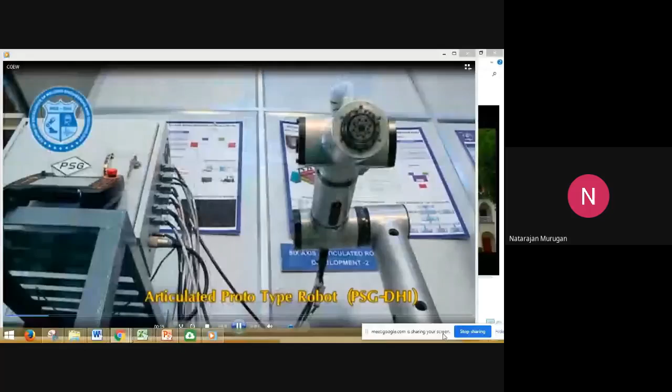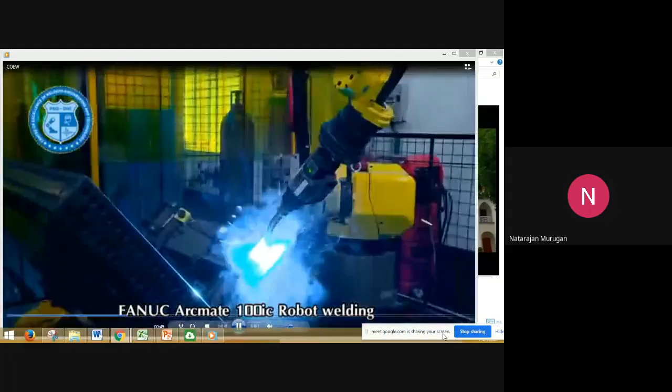PSG College of Technology has established an advanced center of excellence in welding engineering and technology with financial support from the Department of Heavy Industry, Government of India. An articulated prototype robot has been successfully developed as part of a welding automation project. This is a 6-axis robot which has been interfaced with a MIG welding system. A gantry welding system has been developed for welding circumferential and longitudinal joints for applications like pump casings. Weld fabrication of wind tunnel box and carriage components is carried out using this FANUC robot welding.

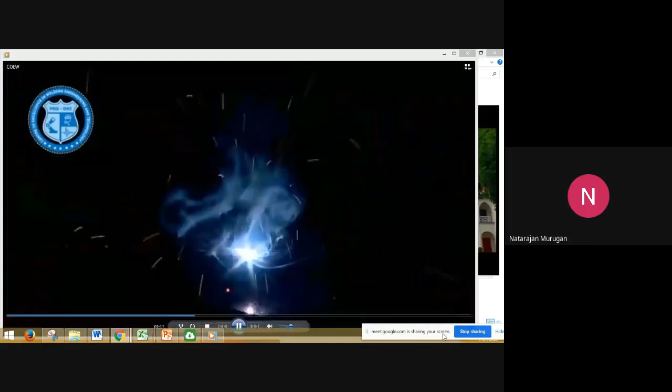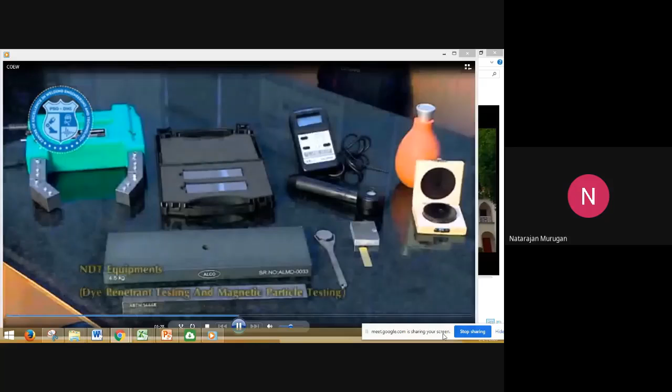The center has developed mobile app-based software for controlling the universal robot welding. The center has established a pick-and-place robot for various welding applications. The center has acquired robotic welding simulation software. A prototype inverter-based welding power source is being developed for GTAW and SMAW welding applications. The center has established advanced NDT facilities like a phased array ultrasonic testing unit incorporating the TOFD feature. Conventional tests like magnetic particle test and penetrant test facilities have also been established.

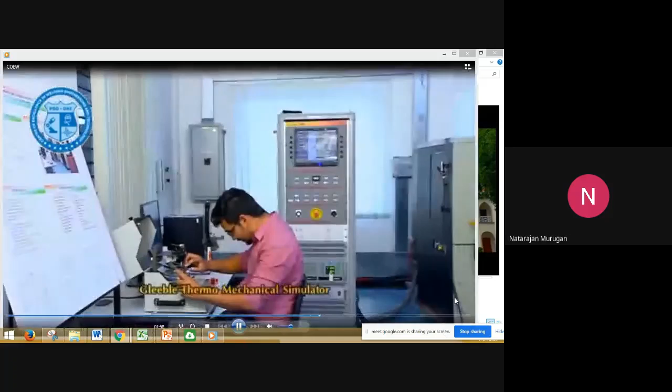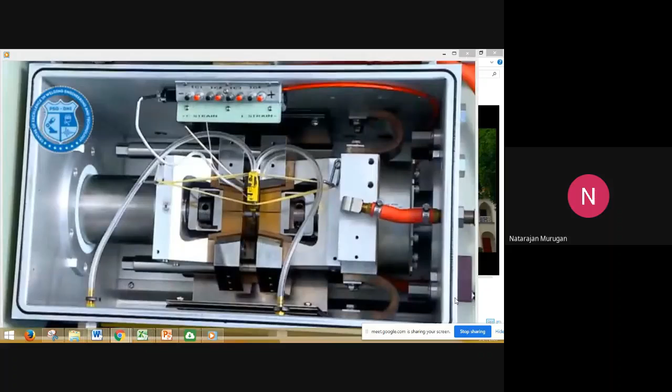The center has a state-of-the-art metallography facility for microstructure analysis. Stereo microscope, inverted microscope, and automated hardness mapping machines are some of the systems in the metallography section. Alloy design is a powerful technique for development of new welding consumables, with Thermo-Calc software established. Arc welded specimens can be physically simulated using this advanced thermomechanical physical simulator called Gleeble. This machine can also be used for physical simulation of hot forming, powder metallurgy, and metal casting applications.

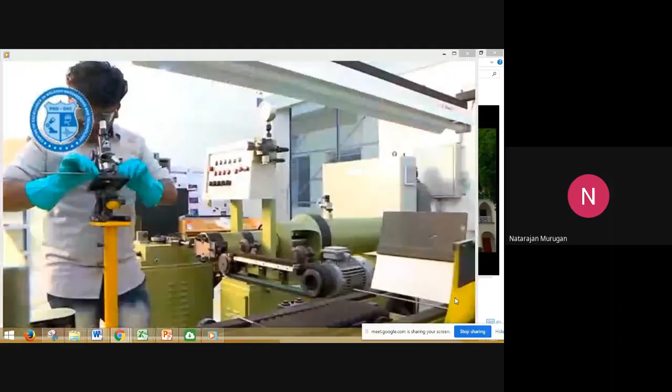Development of newer welding consumables has been made easier through establishment of a pilot electrode extrusion plant for flux coated electrodes. Electrodes of nickel alloys and other alloys with formulations carried out in-house are currently being extruded in this plant. The center has a Hannover analyzer for checking the usability characteristics of welding consumables. Okay.

Okay. So you might have seen the various facilities available in the Center of Excellence in Welding Technology. So those who really want to pursue your PhD or do some trials, experiments, you can use these facilities to carry out your research in welding engineering and technology. Okay. So this is my lecture.

So I will be just introducing what is welding and what is welding automation and what type of welding processes are used for robotic welding. Okay, you cannot use all processes for robotic welding. Only processes which are suitable for robotic welding, especially which can be easily automated. That is the main idea. Which can be easily automated, that can be used for robotic welding.

So before going to that, let me explain what is welding. What do you mean by welding? What are the various processes of welding? Okay, so we generally deal with materials, especially engineering materials. Most of them are metals. Mostly we deal with that. So joining of metals, or welding of metals.

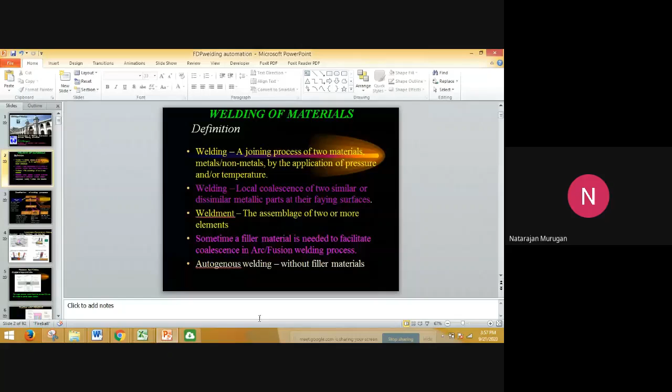Thank you, sir. So welding is one of the major production processes, like metal casting, metal forming, and metal joining. Metal joining is very important. Two pieces can be joined by two techniques: the fusion technique and the pressure technique. Let me give the basic principle of fusion technique.

Two metal solid pieces, when you apply heat, especially locally at the edges where you want to join, not the entire thing, the edges will be heated locally and raised to a melting temperature, above the melting temperature, so that the edges melt. Before it melts, you cannot join. So now the two edges melt and become liquid.

This liquid mixes together easily if it is the same material, like steel and steel that you want to join. So it becomes liquid and the liquid mixes together. Then after solidification, you remove the heat, and the single liquid solidifies as a single solid. So you get the joint.

This is called fusion welding because we raise the temperature above the melting point, the fusion temperature. Our freezing temperature, if you heat it, is the fusion temperature; when you melt it, it goes from solid to liquid, and if it solidifies, that is the freezing temperature. Both are the same temperature, with a slight difference depending on the rate of heating and rate of cooling. It will exactly start freezing or start becoming liquid at the melting temperature. Okay, this is fusion welding.

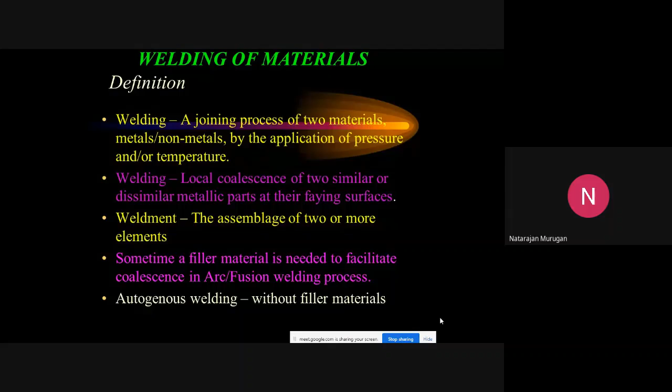So these processes - I have classified fusion welding, and another name for pressure welding is solid state welding, because we are not melting the material. We are just heating it slightly to a higher temperature so as to reduce the pressure required, and apply load so that you can join it. That way they are called solid state welding processes.

Cold pressure welding, if you join at room temperature, and friction welding, friction stir welding - all those are the latest processes. Friction stir welding, and robotic welding we can see.

In this we are going to see only the processes suitable for robotic welding applications. In consumable electrode arc welding, using electrical energy, we have gas metal arc welding, shielded metal arc welding, submerged arc welding, all those things. Then non-consumable processes like gas tungsten arc welding, atomic hydrogen welding, plasma arc welding, and carbon arc welding.

These other processes are additional processes, called allied processes - soldering, brazing, surfacing, spraying, cutting, thermal cutting. Those come under various other allied processes. It is not clearly shown here; only soldering and brazing are shown.

They are similar to joining processes, because you have seen a 3-axis robot. A 3-axis robot is mainly used for soldering and brazing. That's why these robots need all degrees of freedom - mostly we use articulated 6-axis robots for welding, please note. So these are all additional processes - cladding, surfacing, hard facing - they are allied processes.

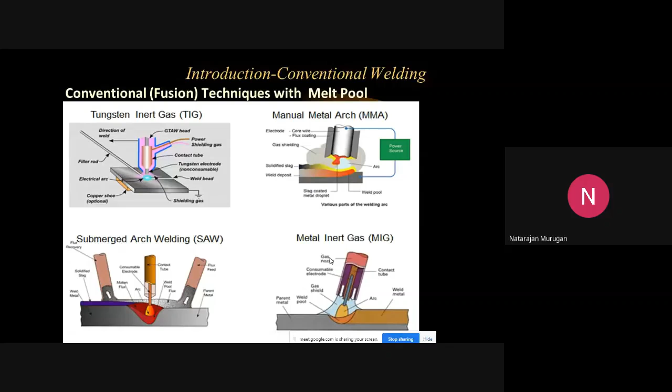This process is very important. Most robotic welding uses the MIG welding process. A lot of advancements have taken place here: CMT, rapid welding, twin arc, so many process developments. I'll just touch upon the basics first, which you should understand, then we can go to other processes. MIG welding I'll touch upon tomorrow.

Resistance spot welding and MIG welding are especially used in the automotive industry. Some 20 years back in the USA, GMAW replaced most of the SMAW process because it has higher speed and higher deposition rate, and it can be easily automated. Resistance spot welding is mostly used in automotive industries for fabrication of components from thin sheets, 3 mm thickness, sometimes even up to 6 mm. You can weld higher thickness also, but mostly it's automotive industries and thin sheets.

Here there are 2 copper electrodes, and current will be passed through them. At the interface, resistance will be high, so I squared R heating will be high at the center. It will melt, and by the application of pressure it will be joined. So this is resistance spot welding at a particular location.

In seam welding, the parts are welded continuously with overlap. Instead of a rod electrode, a wheel electrode will be used, and the parts will be passed through the wheel, so that you get these nuggets continuously overlapping. That is called seam welding. These things we will see tomorrow.

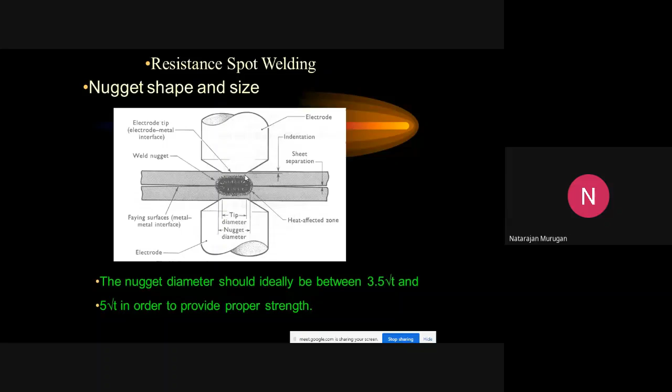Plasma arc welding is an advanced version of TIG welding. Plasma is an ionized flow of gas. You know the temperatures: in gas welding, the flame temperature is 3200 in a neutral flame. The hottest flame is the oxidizing flame at 3400.

In arc welding, we get very high temperature at the center of the arc. The arc will be bell shaped. As the distance from the center increases, the temperature decreases. At the center, you can have 6000 to 7000 degrees centigrade in ordinary arc welding.

But in plasma, practically we use 17,000 to 18,000 degrees centigrade. So here the idea is when you pass another gas called plasma gas or center gas or orifice gas, which is coming through the orifice, which is passed through the center, that's why it is called center gas. So when it comes out as a plasma, very high heat is produced.

The energy level goes up to 10 power 7, 10 power 8 watt per meter square. So that's why metal becomes vapor, and there is a digging, and the mode of welding changes from conduction to keyhole mode, deep penetration mode. Please note that. This way it is plasma, very high temperature, very fast you can weld, but the equipment is very costly.

Even in 1998, when I called for a quotation, it was 15 lakhs at that time. So very costly because of the energy level. So that's why it is not being used in India that much, but we are using it for stelliting. Various other industries, various valve industries, use this process for depositing. So that is wire arc additive, and similarly we are depositing and increasing the properties of the surface. Cobalt based alloys or Colmonoy or Inconel, various alloys we are depositing.

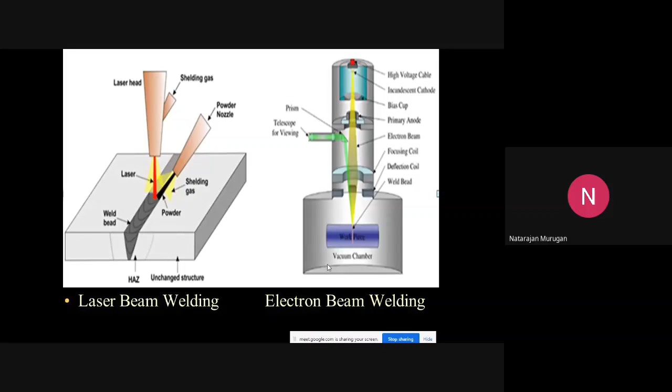There are 3 types of vacuum based on the economical point of view, all those things. Okay, so these are very important processes. The latest process, especially for robotic welding, is friction stir welding. It's a solid state process, 2 pieces to be joined. If possible, tomorrow I will explain in detail with a video also.

So for 2 pieces, just a rotating non-consumable tool is used. When it is rotated and plunged inside, there will be a pressure; load is also given. There will be a pin this way. This is the shoulder, and the pin will be there. The pin will be plunged in the gap between the 2 plates to be joined. Generally no gap will be there initially, so you have to plunge it. It will be rotated and plunged inside.

Due to the friction between this pin and the job, and the shoulder and the job, heat will be produced. The temperature is not going to be raised up to melting temperature, it is lower than that. In case of aluminum, we have seen 400, 450 degrees. Aluminum melts at 660. In steel, we have seen up to 900 degrees, even 1000 degrees, in stainless steel and steels. So it won't be melting temperature.

Due to the frictional heat, the metal will be plasticized and it will be moved. When it is plastically moved around it, when you move the job, this is the advancing side, this is the retreating side. Metal will be moved, and when it moves to the rear side, the metal will be forged and it will be solid. It will be joined together. That's why it's just a pressure, and heat is produced because of the friction.

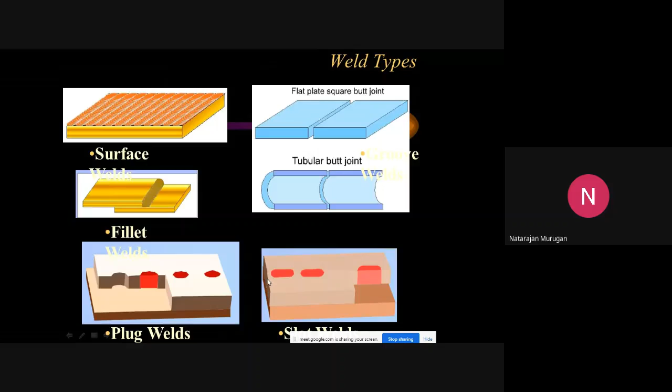Just a minute, please. Okay. There is disturbance. Sorry, just a minute, please. Okay. So these are the questions, please, you should remember, right? Okay. I'm sorry. Just a minute, please. They are doing some work in the house. All right. Okay.

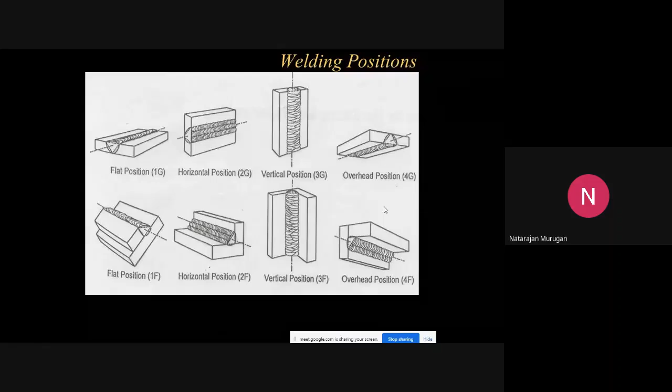What is welding automation? We have seen different types of welding processes. In manufacturing, we know very well automation means doing all functions or some functions mechanically. Here, the welding process consists of various steps, 8 steps. How we are going to mechanize those steps, then we can say different types of automation.

The main purpose of automation, as you saw in the morning class, is mainly to reduce the cost, increase productivity, and improve quality. You can have a lower space requirement and reduce the cost. I know it's not robotic welding automation.

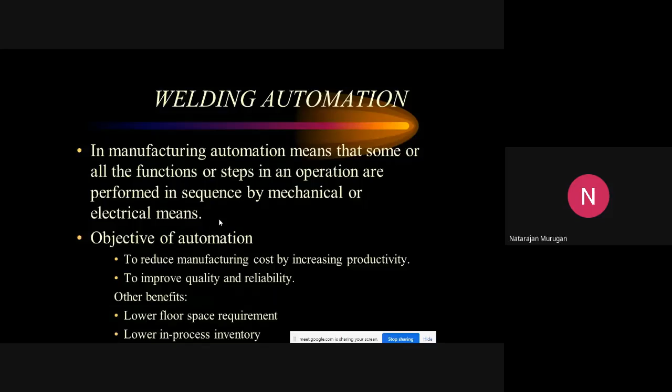Okay, so mainly automation means we have to increase this process. In many processes it is very difficult to weld continuously, so there will be fatigue and other problems, and we may not have a consistent thing. So you can do the work. So that is welding automation.

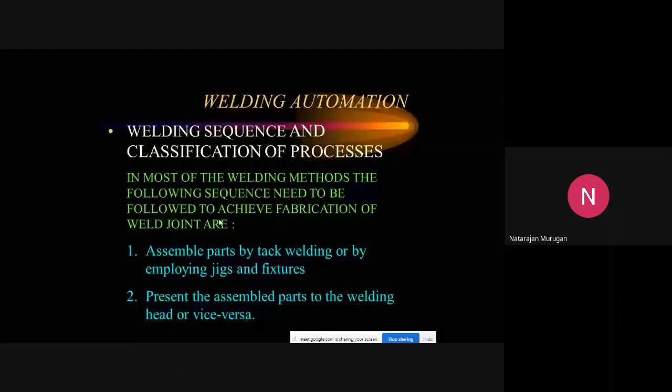Okay, so when you see the welding sequence, there are 8 steps for any welding. So these are classified into 8 steps. First step, parts to be welded. Jigs and fixtures can be used, or it can be just assembled and manually welded. So tack welding, you have tack welded that way.

Okay, so the arc has to be struck. Arc has to be struck. So the arc will be struck, I mean the arc has to be initiated so that the fusion welding will be taking place. Then once the arc is started, if it is maintained at the same place, so that you have to weld the entire.

So you can see in this picture the first step I have just shown by hand written. First step, assemble the parts and tack weld. Second step, it is brought under the welding head. Here I have shown just a stick electrode. Third step, start the arc, initiate the arc. Then fourth step, you have to provide relative movement, start moving it.

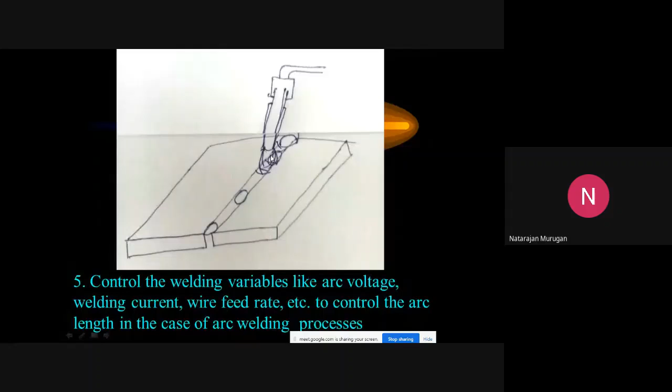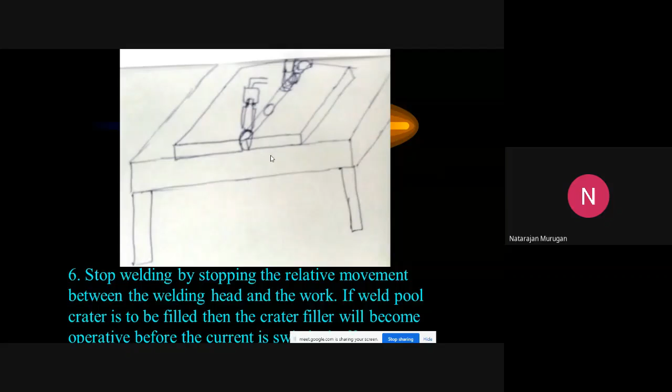And fifth step, you have to control the variables. So arc length, all those things have to be controlled. Then sixth step, just reach the end of it, stop welding. You can switch off the power source, or you can just raise the stick electrode, it will be off.

Seventh step, you can shift the welding head to the original position so that the welding cycle can restart. Eighth step, you can remove the plate, or alternately change the plate after welding and move the head to the initial position. These are the 8 steps, especially for robotic welding.

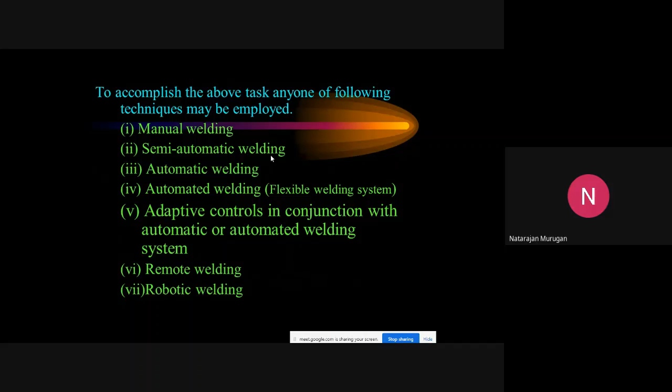So based on these steps, if you want to automate, depending on which steps are automated, this will be classified into various levels of automation. Types of automation: manual welding, all 8 steps are done manually. Semi-automatic welding... first, manual welding, all steps.

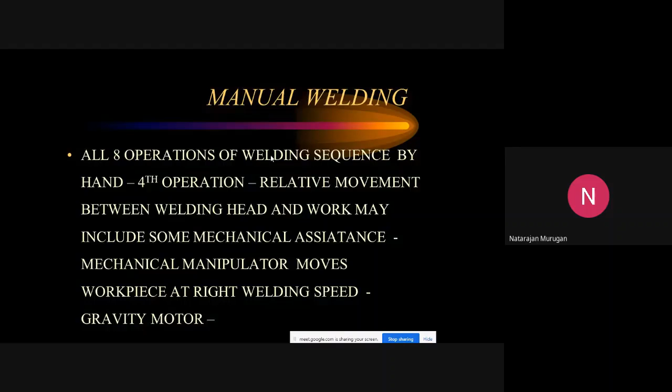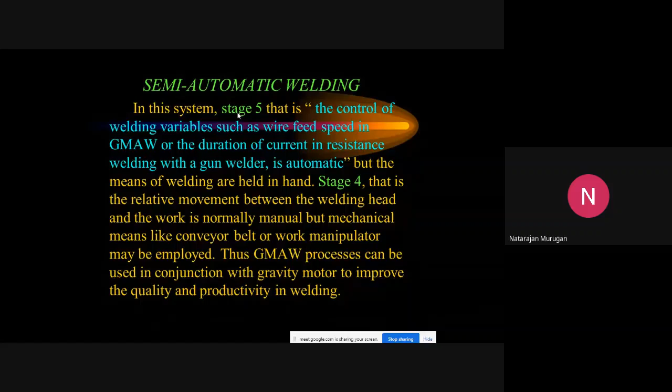And semi-automatic: here the fifth step, control of welding variables, arc length, current, voltage, is controlled in the power source by setting it. Once set, there is provision to maintain a constant arc length, and voltage is controlled. Sometimes stage 4, relative movement, is also done mechanically. Then it is called semi-automatic welding, mostly used for stage 4.

So at the end of the weld, generally if you see, there will be a small depression, because when the welder wants to stop it, he will be just pulling the electrode. So he may not feed the molten electrode at that location where we want to stop the arc. Because he is pulling the electrode, increasing the arc length, the arc will be quenched off. So at that time he may not feed the metal. That's why there will be a depression, and in that depression there will be crater cracks sometimes, because the thickness will be very less compared with the remaining portion of the weld, since the metal is not added.

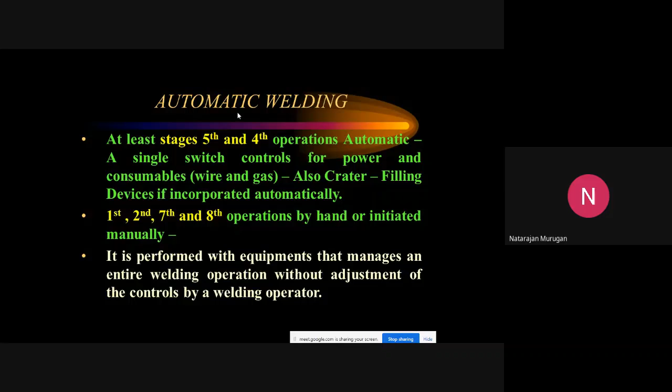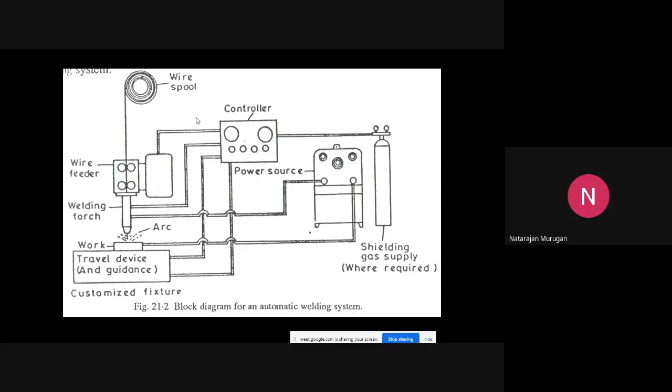Then these are some of the examples of automatic welding process. You can see the arc is starting. All the power source, everything will be controlled. Only 1, 2, 7 and 8 will be manual. Other things will be done by the process control. And this is also similar.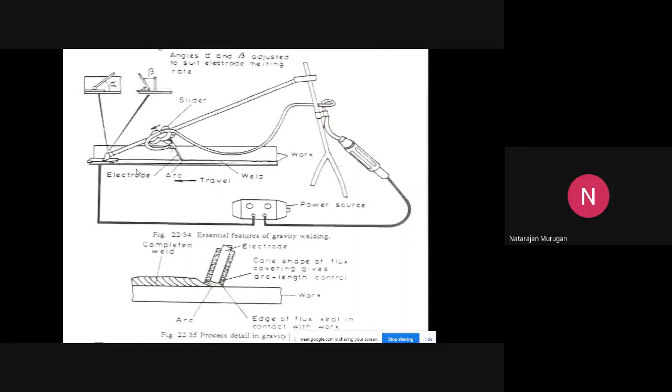In this automatic process, they can also use gravity welding, use of the gravity. What is gravity welding? Here there is a sliding slanting rod, in which an SMAW stick electrode is fixed. When it is dropped from here, you can easily weld from here to here. The length will decrease automatically. You have to set the slant angle properly based on the melting rate of the electrode. Please note. These were initially developed for automatic welding, and now it is very cheap, low cost. Firecracker welding is also similar, and that is still being used.

There are a lot of advantages in automatic welding. The only problem is you have to do it in mass, so that the number of parts welded will be more. Then it will be very useful, but it requires capital investment. And you can have a good quality weld continuously, consistency, all those things are main advantages.

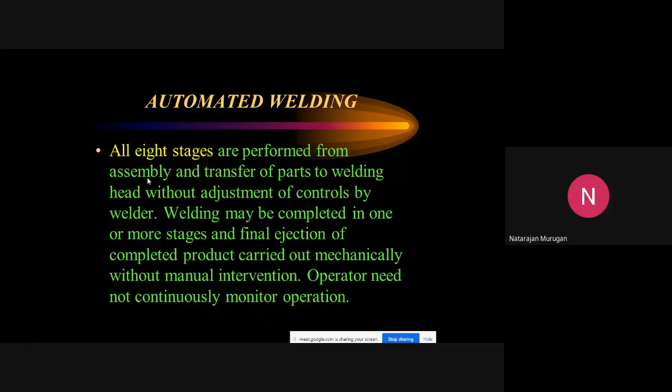Then what is automated welding? All 8 stages, from the assembly to the transfer of the parts, are completely carried out by machinery. That is called automated welding. Very few processes are like this. You can see this complete automation process, some of the automated welding processes, including loading and unloading. All the things are possible. So, setup.

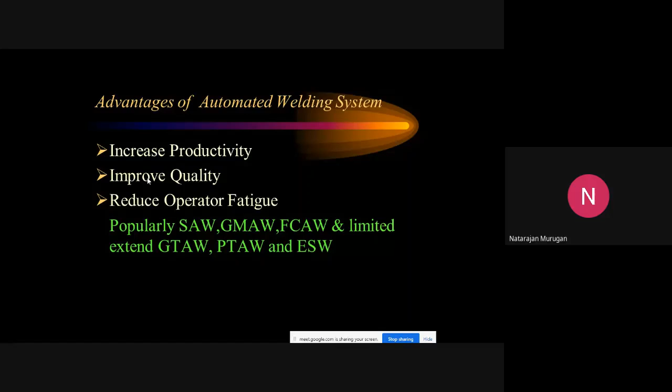Okay, so this automated welding mainly increases productivity, improves quality, reduces operator fatigue. This is mainly used completely. A supervisor just watches how it is going on. There is very rare intervention of the manual welder. Mostly such systems are costly, but flexible, with all the advantages you can have.

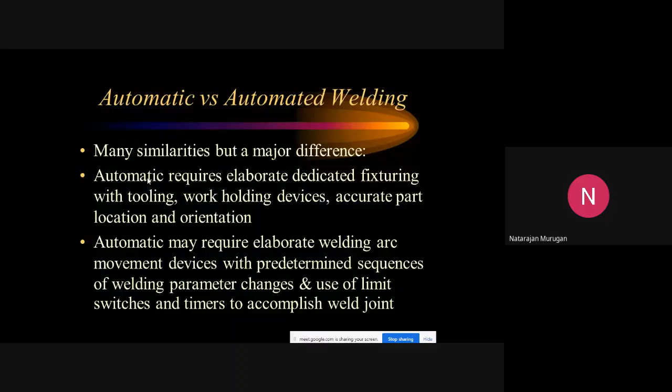So what is the difference between automatic welding and automated welding? You know very well, all the processes here. So steps 1 through 8 will be done manually in automatic welding, while automated welding does this completely. In automatic welding, jigs and fixtures will be used. There are a lot of investment changes with respect to the various components, depending upon the components. So that is the difference between automatic welding and automated welding.

Sometimes in other places people refer to automatic welding as mechanized welding, and automated welding is simply called automatic welding. Please note the terminologies they use. These terminologies, automatic and automated welding, are very commonly used.

Automated welding eliminates all elaborate expensive fixtures, and time and limit switches used to stop the machine. In automatic welding it senses the limit switch and stops. But here, in automated welding, everything is completely programmed - each and every thing is taken care of by the process. Sensors and a lot of other things are there, and correspondingly you get good quality, production, flexibility - all advantages are there in automated welding.

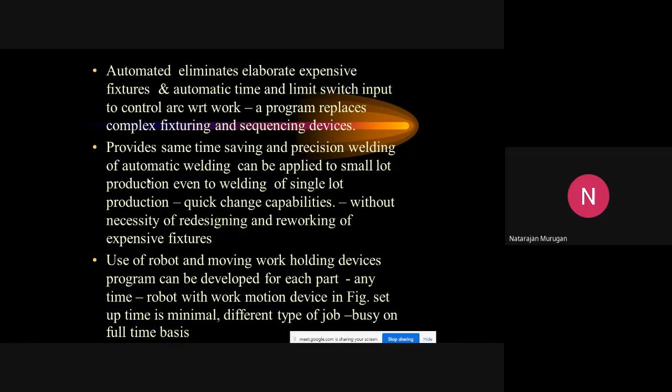Use of robots and moving work holding devices - AGVs can be programmed to supply and remove the parts, welded parts, etc. So this is just an example, an industrial MIG welding robot setup.

So these are the positioners, right? So the arc will be exactly moved based on the program in the controller. In the first session you have seen what is the function of a controller. So we have a welding controller, and the welding controller is the power source. There are different types of power sources. In olden days we had conventional power sources - rectifier and transformer, inverter, all those things.

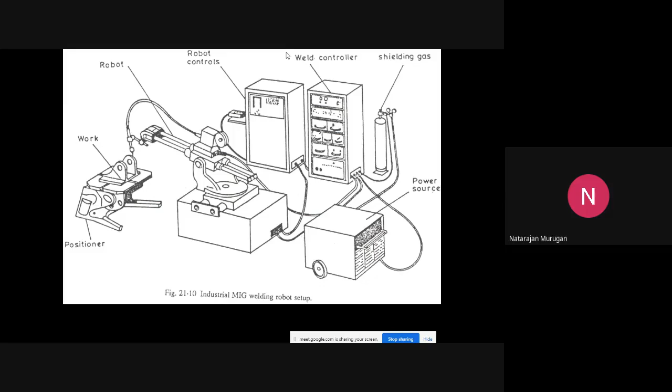The latest controller should have digital control, so that you can easily interface it with the robot controller. Through the robot controller you can control this - you can set welding current, voltage, all those things. Speed will be set in the controller because we are moving the robot. So all those things please note here. You can completely do all rotation, everything here. So this is a universal microprocessor-based welding system - a simple microprocessor can control all aspects through a proper interface, sensors, everything.

Just skipping to adaptive control, like in adaptive control in CNC machines - here also, how to move the head automatically along the seam, the center part, the joint part. Along the center, various techniques are used. That is called seam tracking - when you follow the center joint path, that is called seam tracking. Various methods are used.

Why is it important? When the head moves slightly away from the center, then there won't be proper fusion. One plate will melt while the other plate will not melt fully, and you won't get full penetration. That's why seam tracking is needed. Manually, if you do it, you will just be moving along the center, but mechanically you have to move it.

Mechanically you move it, so in that case it is essential that the head has to move along the center. There are different methods available - mechanical,

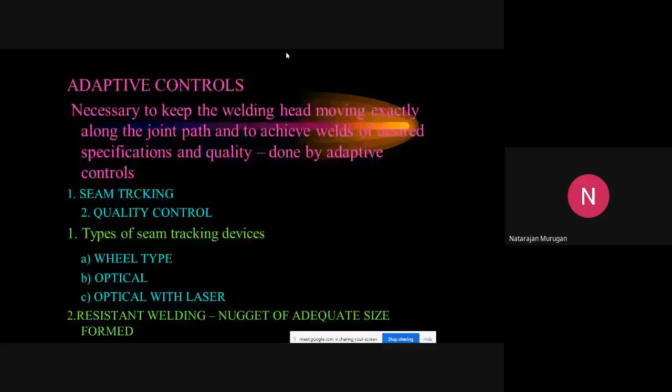or laser, optical, laser with a laser sensor - it is there. This will be used for a wheel, like a roller, like a wedge moving along the center, and the head will follow that. That's why you see this wheel - here the welding head will be melting and fusing the plates. This is a simple technique.

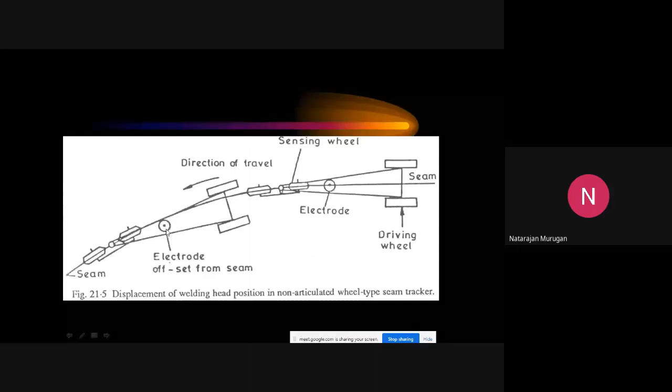You have others too - even in curvature you can do it. The seam will be along a circular or other profile, so it can be moved like this, sensing, and it will be moving. These are the various techniques - optical type. The optical sensor will sense the seam, the center of the joint path, and give the corresponding signal. The computer will move the gun this way or that way accordingly.

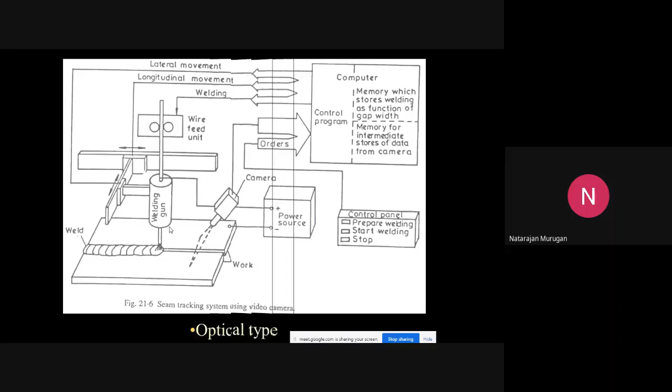Vision systems are also used here - this is an optical system. You can have a laser system or electromechanical devices. There are a lot of systems especially for welding automation. When you do it in automated or mechanized condition, it has to be moved through the center of the path. So there are a lot of methods.

Sophisticated type, it may oscillate the arc also - oscillation of the arc to increase the width of the welding. You can do it this way. Manually it is done generally for bridging the gap.

Some places the gap will be more, some places less, as two plates are joined. The welder will sense where to move, where to deposit more material. But during automation, this has to be sensed by the proper sensor, and it has to be communicated, and the head has to oscillate or move accordingly.

Laser beam also is used for tracking the joint path, but it's costly based on that.

So remote welding, also, is welding automation - like for nuclear reactors. We can't go inside a nuclear reactor, so all operations can be programmed, and a robot will go inside and do the welding. There is no monitoring or adjustment during operation, no human factor, for maintenance operations, especially in nuclear reactors.

Various other places too, suppose welding in space - some components are in places very difficult to access, you can't go there. In such conditions, this remote welding is used.

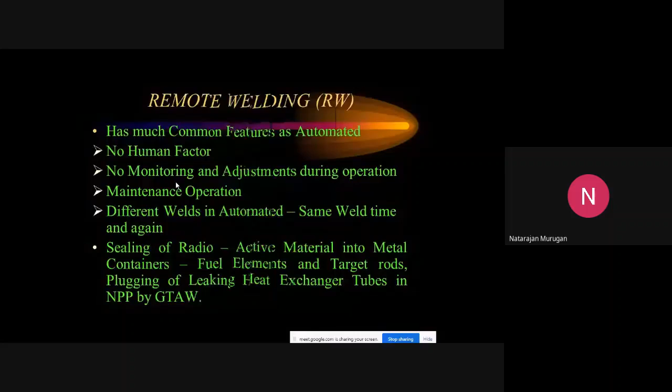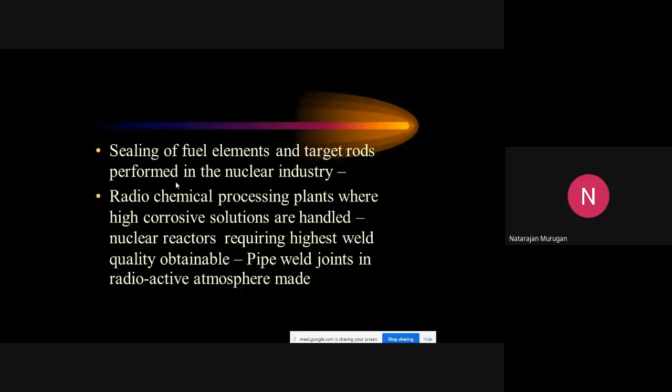Sealing of fuel elements and target rods in the nuclear industry is very commonly used. In radiochemical processing plants, highly corrosive solutions are handled, so those conditions require a remote welding process. This is operated remotely, and it will go and plug leaking things - all those things are possible.

Now for robotic welding, a part of automated welding. What is the main function here? It provides the relative movement, and it provides the gap also between the electrode and the job.

We can program it carefully, so this is mainly for repetitive jobs. All the actions of man - monotonous and fatigue tasks - will be carried out by robotic welding, providing cost-effective solutions to many arc welding tasks. Whatever the program, you have flexibility - whatever way the job requires, we can call the program, edit it if you want, then run it and weld.

Mostly 5-axis or 6-axis articulated robots are generally used in robotic welding, suitable for a range of tasks, with the program stored in the controller's memory. At any time you can do offline programming and load it to the robotic controller, then perform it.

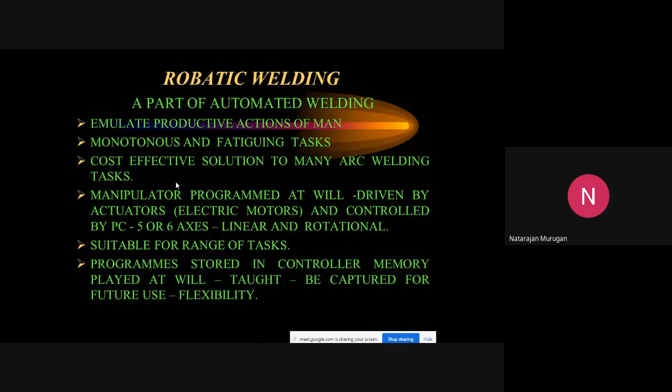Various ways are there - it's a big welding robotic system. I have one system, this I'll show you.

That is the latest process, wire arc additive manufacturing. If you see that, this is especially for robotic welding - instead of welding, here is what we go for.

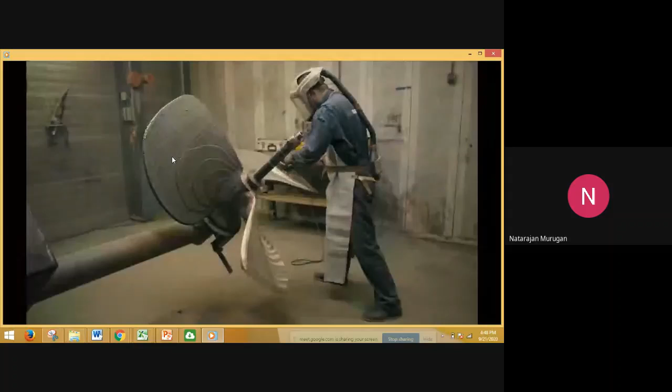Damen Stan Tug 1606 workboat. Many have come before it, and this will certainly not be the last. Still, this one is special, not because of what you see above the water, but because of what happens below the water. This vessel is propelled by the WAAMpeller, the first class-approved 3D printed propeller. This project took 7 months to complete and brought together key players from different industries, all with the same goal: to manufacture and certify the world's first wire arc additive manufactured propeller.

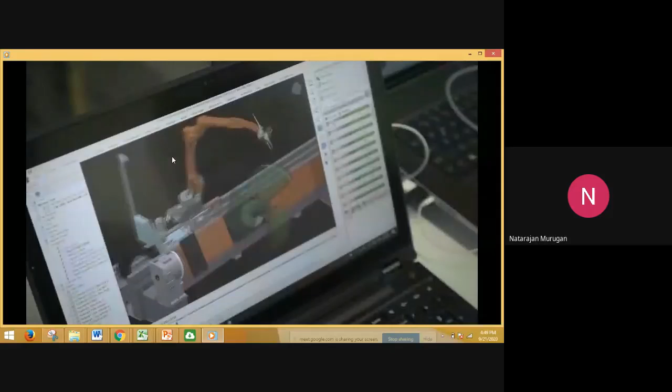The starting point of the project was a propeller designed by ProMarin. Before it could be sent to the 3D printer, the design first had to be transformed into a so-called CAM strategy, a detailed plan of how the printing of the complex double-curved geometry of the propeller blades should be carried out. This strategy was worked out by Autodesk using their PowerMill software application. Meanwhile, specialists at RAMLAB in Rotterdam started tests to ensure the WAAMpeller would be strong enough for the job. Through different material tests and prototypes, the building strategy was finalized.

In September of 2017, everything was set to start the production. By printing a total of 2.6 kilometers of nickel aluminium bronze in 298 layers, RAMLAB created the WAAMpeller in one go over just a few days, printing around the clock.

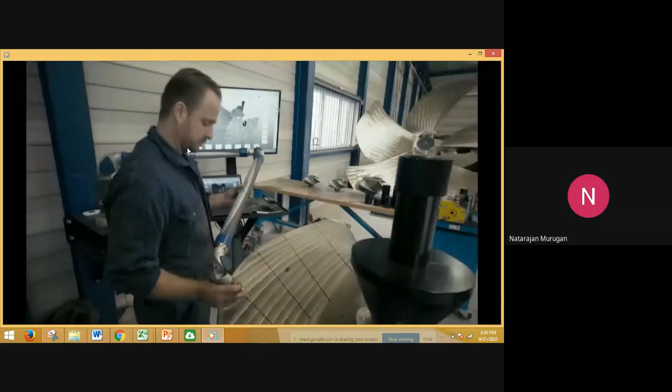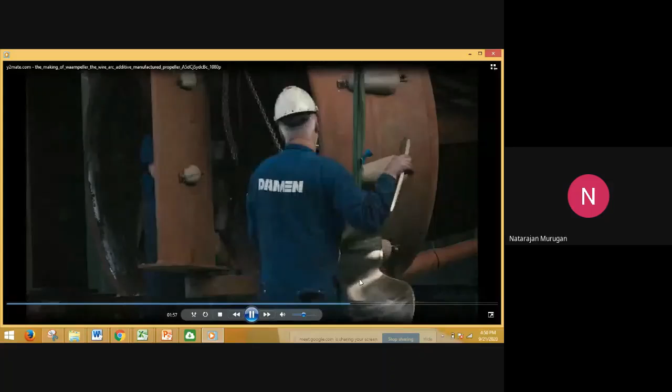With advanced 3D scanning methods, the propeller was checked and finished by ProMarin and deemed ready for testing. For the last stage of the project, the WAAMpeller was brought to Damen shipyards in Gorinchem, where it was installed on the Stantug 1606.

Okay, so here is a latest process called wire arc additive manufacturing. Robotic welding is used, especially the MIG welding process. You can deposit different materials also, so functionally graded materials you can deposit. So that way, this is robotic welding.

Setups are there, just compare with that. So all types of welding robots are very commonly used. The processes, especially based on the processes, we classify like this, not based on the architecture of the robot. Spot welding robot is commonly used in automotive industry, and there's arc welding robot, TIG welding.

So with the laser, what is the process we use correspondingly? We call it that. Systems are mainly used in hazardous, dirty, tiring job conditions. So we use this mainly to increase productivity, consistency, minimum wastage of materials, and stabilized labor charges.

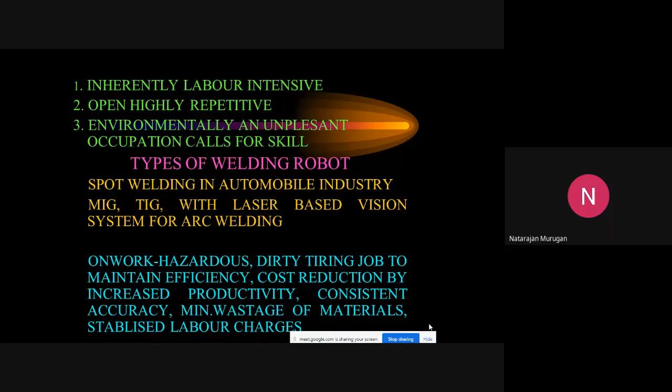So tomorrow I will cover wire arc additive manufacturing a little bit. These are all completely robotic welding setups, and you can control it. You can see this robotic welding used in various places, car bodies, and various fabrication processes.

So these welding processes, especially for welding automation, we have to move the arc, or we have to provide relative movement between the arc and the work, especially. So how do you provide it? What are the facilities available? Just touching on that.

You should know what devices are available, how they are classified, especially for welding automation. For welding automation, robots we use it. But what are the other techniques available for providing relative motion? That is, to automate the welding process.

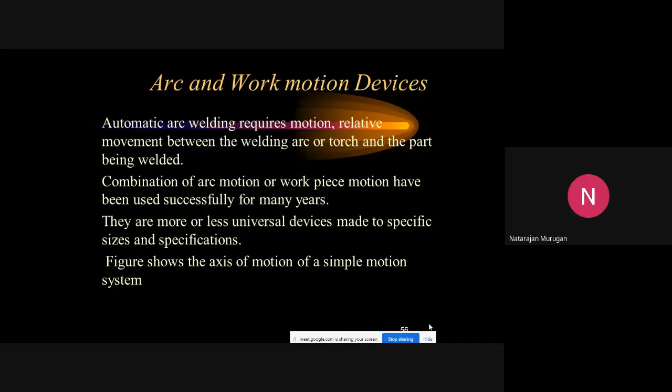We are looking mainly at welding automation. These devices, you can see, provide simple motion. You want to weld here, and the job can be rotated or swiveled. Here, if you fix the torch, it can be moved in X direction, Y direction, and Z direction. Y is longitudinal, X is transverse, and Z is vertical. Please note the general terminology used.

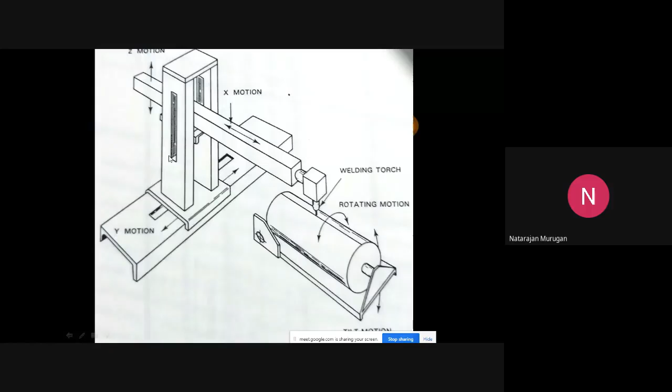Generally, these arc and work motion devices move the arc or torch and welding head along the joint. The welding head will have this arc and torch, and it will be moved along the joint, while the welding operator only performs a supervisory role. He may not do anything except adjust the torch to guide the arc, or change one or more welding parameters to overcome deviation in the welding.

The operator is just removed from the vicinity. More current and higher welding speed can be used than in manual welding when you provide such relative motion. Fatigue of the operator will be reduced, eliminating fatigue and increasing productivity.

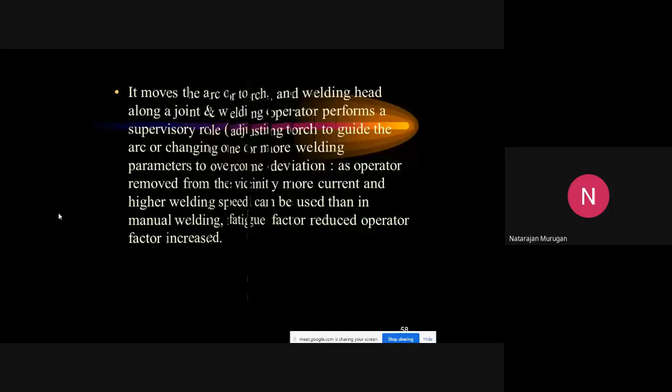What are the arc motion devices? There are various types of arc motion devices. It is used for GMA, flux core arc welding, or submerged arc welding, or also for GTAW and PAW plasma arc welding techniques. There are 5 types available.

Tractor for flat position—the tractor will have wheels so it moves on rails, mostly for flat position. Welding in a horizontal position is called flat position, that's why you should know about positional welding. Carriages are for all positions, moving in X, Y, Z, and vertical directions. Side beams move along the sides, along the beam, while welding.

Okay, manipulators. So you can have X, Y, Z manipulators. I developed a computer-controlled welding manipulator in '93 for my PhD. Okay, so you can have X and Y movement. When servo motors are used to control X and Y movement, the torch will be stationary. This table will be moving.

X and Y movement. With two axes, you can have any shape like a circle or rectangle, square. All this you can make, because two axes, X and Y, you can control.

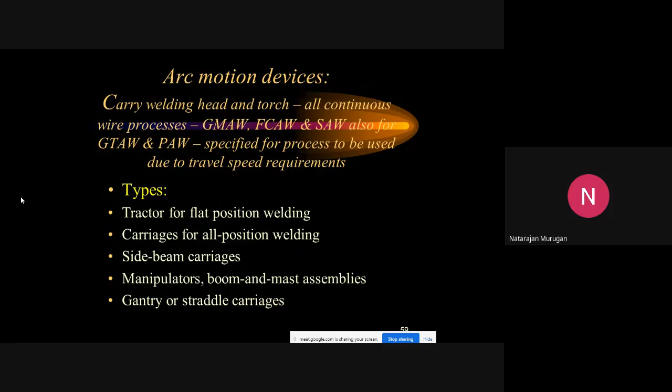Okay, manipulators. So gantry type, you might have seen in the video. Gantry X and Y movements will be gantry type movement. Okay, this is just an example. Manipulators. So the arc here, the welding head, can be moved. Okay, here it is. So it can be moved and weld.

So this movement, vertical also you can have movement, X and Y movement. And there is also a movement here. You can move this way. Okay, longitudinal, transverse and vertical. So precision things are also there.

Especially in TIG welding, you have to maintain the arc length. Mainly it will be maintained at 1 to 3 mm, the distance between the tungsten electrode and the job. In plasma, you can have a slightly higher distance, 6 mm you can go. But the distances should be maintained very accurately. That's a precision manipulator used for GTA welding.

Okay, so what are the work motion devices? There we moved the arc. Here we move the job. A combination is also available. Here the job will be rotated and the torch will be stationary, when you are welding a circumferential seam in case of pipe welding.

So universal or tilt-top positioners. It can revolve, it can rotate, it can tilt. So all these are universal positioners. Turning rolls, mainly used for pipe welding. The pipe will be continuously rotated by the rolls. Head and tail stock: a huge component will be mounted between the head and tail stock positioner, and it can be rotated.

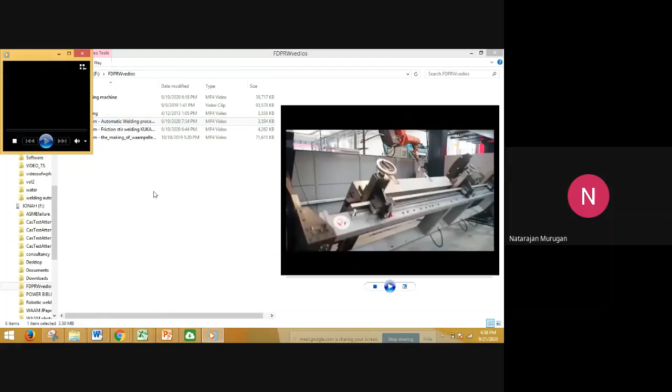You can see in this video one or two of this type. Just have an idea about it. This will be very useful. So automatic, this positioner. For welding automation, think of this. See, the entire component will be rotated with the head and tail stock positioner. You can see the welding. The robot is also moving. This is used for positioning the job.

Okay, even for robotic welding, this positioner is essential. So this way it will be useful, right?

Stop. Just to show you one.

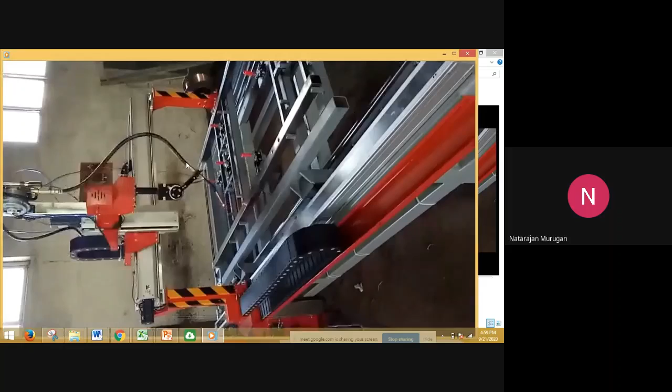Okay. So similarly, we have this machine also. Here you can see it goes vertically and linearly also. The arc goes to various positions, vertical as well as horizontal. So X, Y, Z movement.

Okay. These are different types of positioners. Here, arc and work motion devices: the arc is moving and the job also. Here the job is stationary and the arc is moving. So that way you can have these types of things, right?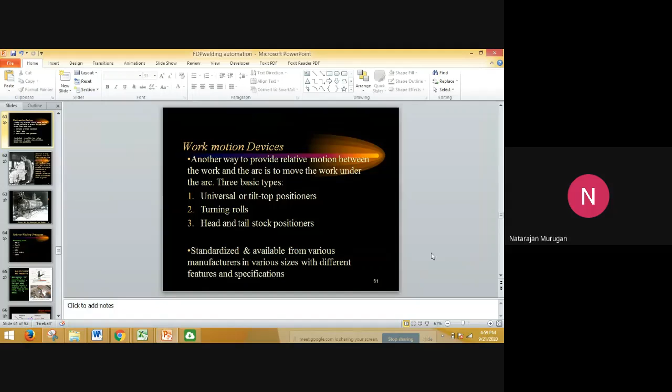Okay. I'll just go to the presentation mode. Various manufacturers make standardized work motion devices. You can see there is a roll and a universal tilt-top positioner here, for positioning. Just to show you some pictures.

These are the rolls here, to rotate this entire pipe, to weld it. Fins are welded, and the seams are welded. This may be stud welding type. You can join those things.

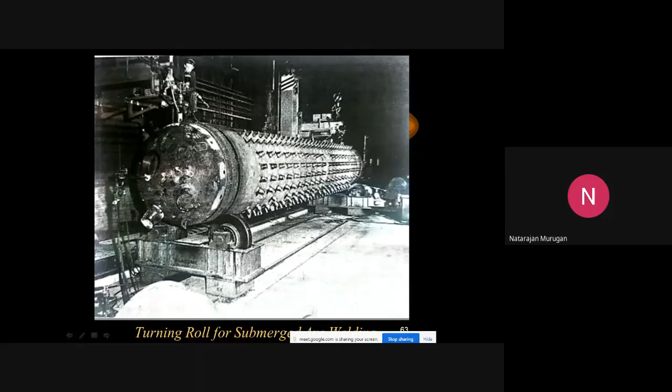Okay, right. So now we have seen what welding automation is and the different types of welding automation. And processes, we have touched upon various types of processes very commonly used for robotic welding. These are the processes.

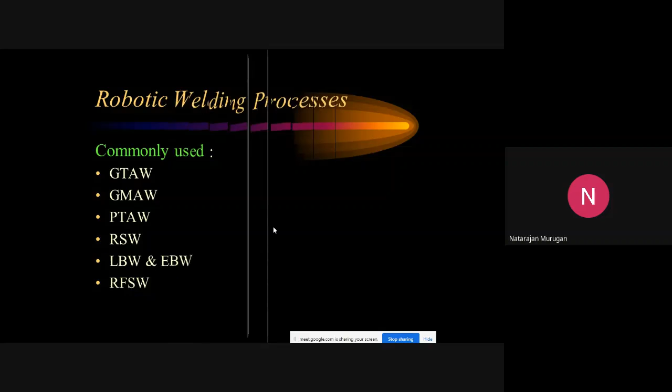So the main important process is the TIG welding process. I already explained TIG welding. Thin plates, good quality you can get. Additional filler you have to put because a non-consumable electrode is used. That is the process. When you see the cross section, the torch will be very light and easy to handle.

There is a ceramic nozzle, and a tungsten rod will be inserted into the collet. The arc will be created with the tungsten electrode on the job, and if you want to fill it, additional filler metal will be used.

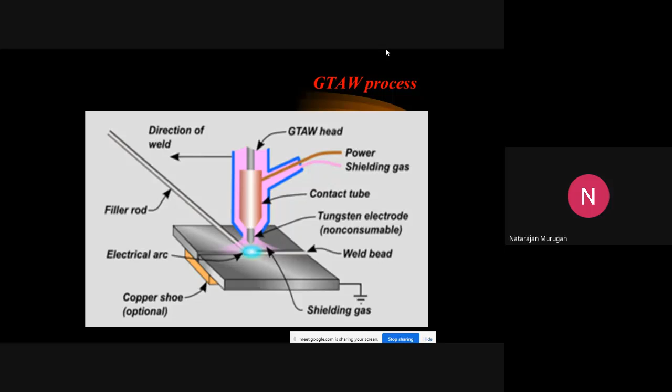The advantage of this process: if you don't have any filler, you can take a strip of the base metal and use it as a filler. You can feed it manually or automatically. That is the main advantage of this process. You need not have a separate filler.

Robotic TIG welding, and there is a video, right? I will leave it now.

So this is TIG welding, autogenous welding, or simply welding. When we add a filler rod, it is just welding. When we don't add a filler rod, we just melt and fuse thin plates. Up to even 3 mm, 2 mm, you can melt and fuse without filler. That is autogenous welding. So robotic TIG welding with filler and without filler I have shown.

Here you have to select the tungsten rod very carefully, and you have to grind the end of the tungsten rod. The included angle at the tip of the tungsten rod is also very important. Separate grinding machines are available, because you cannot use an ordinary tool and cutter grinder for grinding tungsten, since it may absorb carbon from that, which will result in tungsten inclusion or other defects in welding.

With pure tungsten it is difficult to initiate the arc and to maintain the arc, so there are some additions. Pure tungsten life is also very less, so various alloying elements are added to the tungsten rod.

Each of these processes would take 1 hour; I'm just giving you the basic process very briefly, because unless you know the process, you can't do better welding with a robot. The TIG process is a very good, very efficient process. You can have good quality.

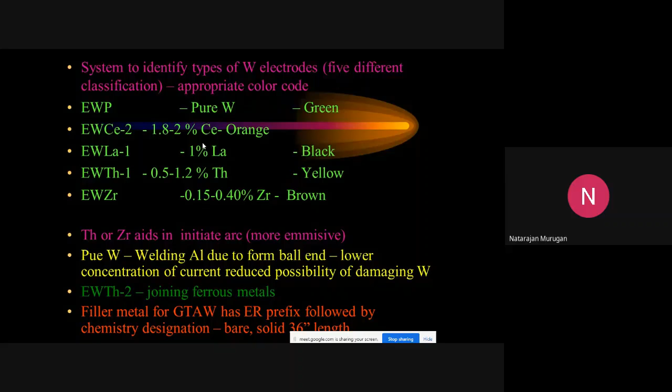Aluminum has a high affinity for oxygen, so it immediately forms aluminum oxide on the top surface. Even if you remove the oxide formed on the surface, it will form again immediately. So what is the difficulty? This adherent aluminum oxide layer will not melt quickly, because its melting point is 2050 degrees. Pure aluminum melts at 660; alloys melt at 600 or 700 depending on the alloy, less than 800.

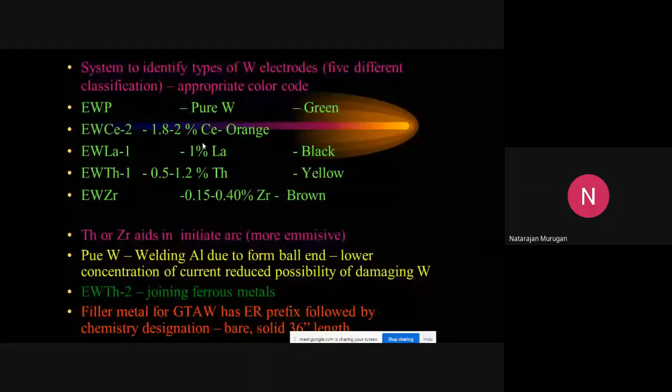But this oxide scale will not melt, and then it will result in porosity. So you have to clean that by another technique called cathodic cleaning. These are the various methods you can use. This is the power source. A constant current power source is used for TIG welding.

Suppose the welder manually moves up and down. Here we use digital Fronius machines for robotic welding. Conventionally, they use rectifiers or inverter power sources. In that case we have the control parameter: when the hand is moved up and down, the current will be constant. The power source provides a static characteristic called the constant current characteristic, so it will not affect the weld even with slight changes in the arc length, the distance between the end of the tungsten electrode and the job.

These are the very important parameters: welding current, voltage, gas shielding, welding speed, filler metal, and arc length. They have to be controlled very carefully. The electrode angle is also very important. You can see the effect here.

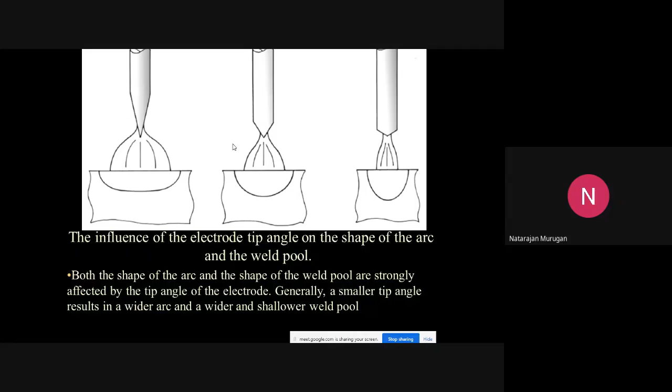When the angle is broad, more than 60 here, you get a deeper penetration. Thin means this joint will be affected very quickly. So generally they keep it at 60 degrees. Each and every small aspect will influence the quality, so you should know that.

Electrode negative, electrode positive. Generally non-consumable electrodes are kept electrode negative, because in the arc, approximately 2/3 of the heat is produced at the positive polarity and 1/3 is produced at the negative polarity. So if a non-consumable electrode is used, it should not be heated up unnecessarily.

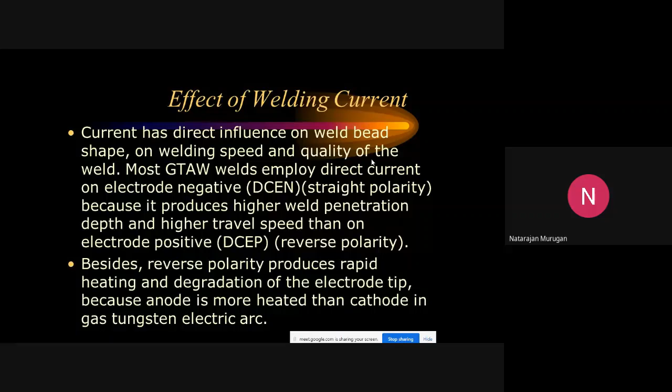Otherwise the tungsten will heat up and the end will melt, and it will deposit; tungsten inclusion is a defect. To avoid that, we have to water cool the tungsten electrode. So generally electrode negative is used for tungsten electrode, and the job will be positive based on this polarity.

When the job is negative, electrons flow from negative to positive. When the electrons flow, they liberate the oxide, especially in aluminum welding. It is not a single point; the arc is created between the end of the electrode and the job. Here it is the end, and here it is a flat surface. That's why it is called the cathode spot.

That spot is not constant at a single point; it moves at random, and during the random movement it liberates the oxide layer. That is called cathodic cleaning. So if you use AC current, during the negative half cycle the cleaning action will be there. In the positive half, heating and melting of the plate; in the negative, cleaning of the plate. That's why the best process for welding aluminum is AC TIG welding.

So you have to use an AC power source even in robotic welding. In AC welding the penetration is also different. This is the ball formation. When the electrode is negative, the shape will be maintained. When the electrode is positive, even if you grind it like this, it automatically becomes ball type, because it tries to reduce the current density, which is current divided by the cross-sectional area of the wire. It naturally increases the cross section, so it will not quickly melt and be deposited. Overheating is avoided by nature itself.

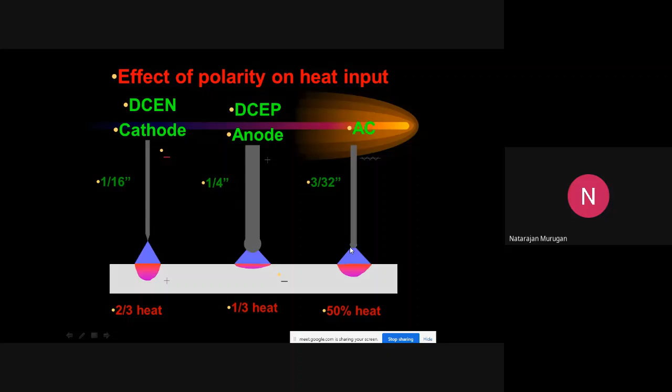In AC current, you get a small ball because of the alternating positive and negative cycles. So you can see here, when the electrode is positive and the job is negative, less penetration. Job positive, more penetration. With AC current, intermediate penetration. So you know the current level.

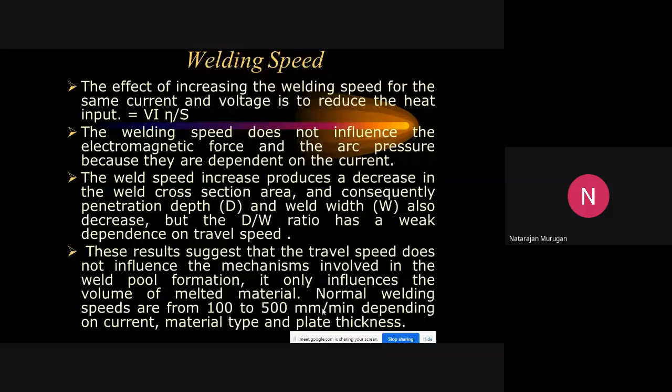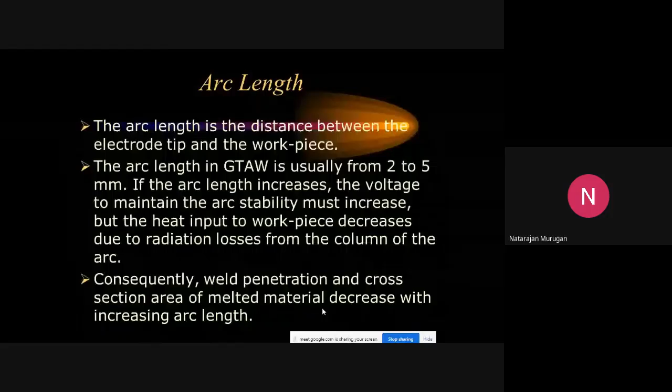About arc length: it has to be very carefully controlled. An arc length of 2 to 5 mm will be maintained. As arc length increases, voltage increases, and the arc stability will be reduced. So you have to control this arc length very carefully to get a good proper bead.

Shielding gas will also affect this welding. Mostly argon is used, no oxygen. Sometimes we use oxygen for stainless steel MIG welding and other things, but here oxygen will oxidize the tungsten electrode. Even CO2 is not used, since the oxygen will oxidize it.

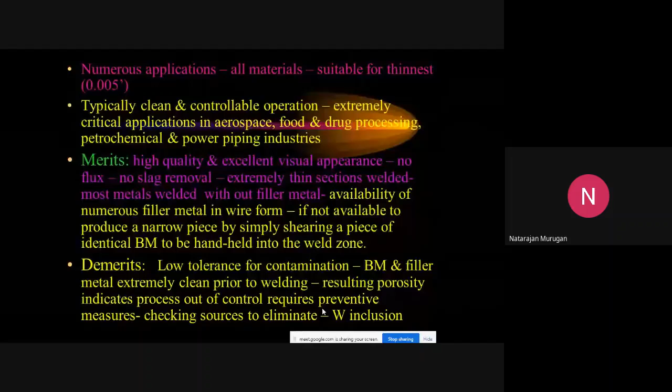So I will stop here for now. I will continue tomorrow with other processes, MIG welding, variants of MIG welding, and others like laser beam welding in the next class. There are variants of this TIG process also; I'll touch upon them later, and what the advantages are.